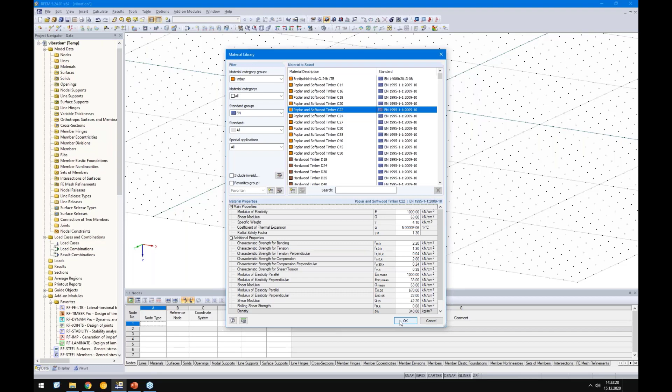So how do we do this? Let's go back to RFEM, and let's start with the timber. I will create a new material. Watch out, they have used 10,000 Newton per square millimeter, not 11,000 as C24, but in this case we can simply use a C22, which should have 10,000 Newton per square millimeter. Then I click OK, and the height of the timber is 200 millimeter and the concrete is 100 millimeter.

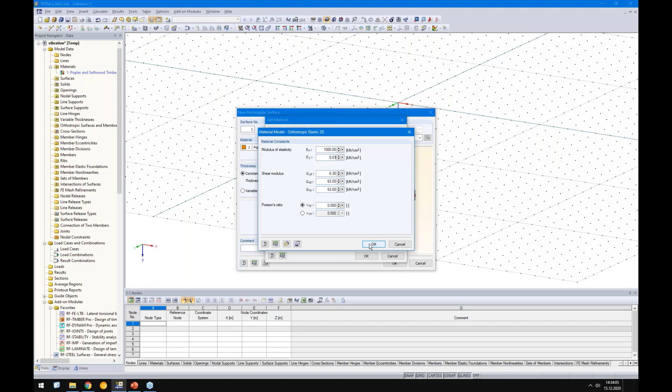So I will enter 200 millimeter, and of course it's still an orthotropic surface, otherwise I will get an error message during the analysis. You see here we have the X direction with a strong E modulus and the weak one in Y direction. In this example we can directly set it to 0 because in the hand calculation from the source, no stiffness was considered from timber. There's a tiny stiffness, but not much. So it's an orthotropic surface with 200 millimeter.

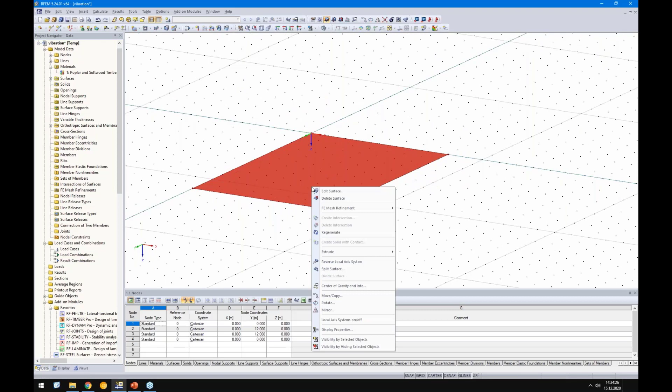So it has 8 by 12 meters. Let's double check, 12 meters and 8 meters. Then I will copy this surface and create a concrete. The thickness was 20 centimeters and 10 centimeters, which means we need to lift up this concrete surface by 0.15 from center to center.

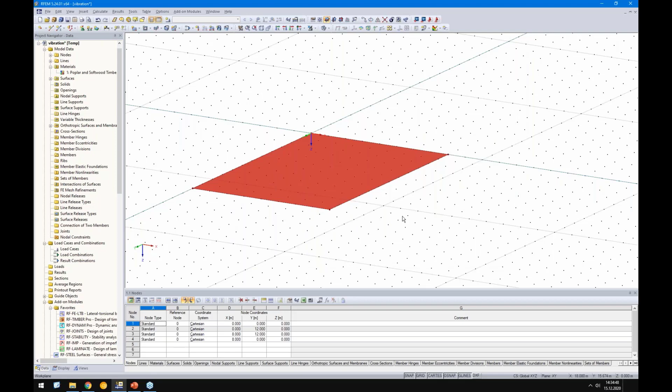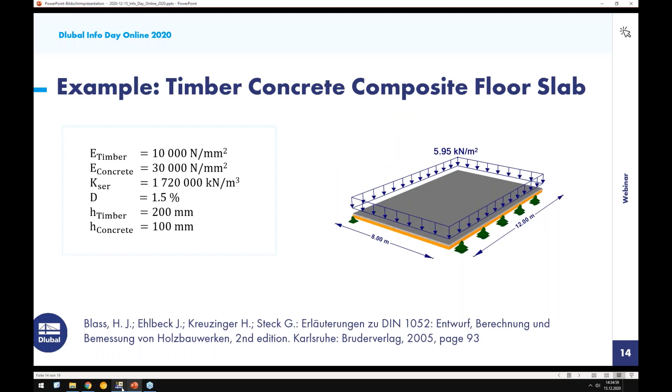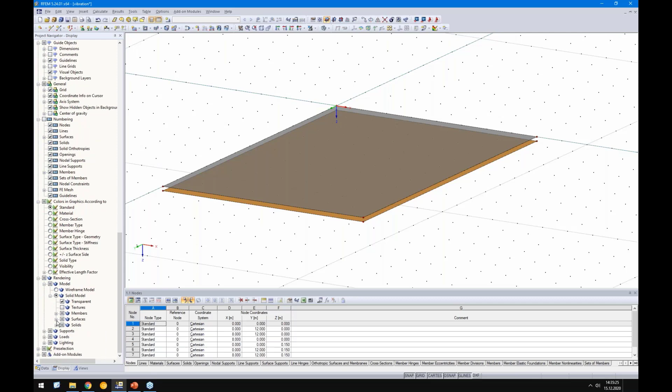So we need a new material here. They have used 30,000 Newton per square millimeter, so we should use a concrete with about 30,000. It's a C20/25. But it has only 100 millimeter, so we will switch this to 100 millimeter. Afterwards, let's check if everything is correct. We activate the thickness for the surfaces, and when we zoom in, we see this is the concrete from here till here, and from here till here the timber, which looks fine.

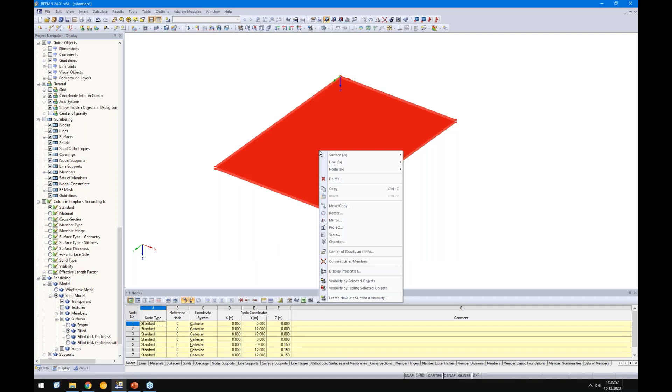What we need to do now is connect the concrete slab with the timber slab. I will show the possibilities on two examples. The first way, I start with a contact solid. I select these two surfaces and say create solid with contact. You see directly we get some boundary surfaces. These boundary surfaces have zero stiffness because they get the stiffness from the contact solid. We will define this contact solid.

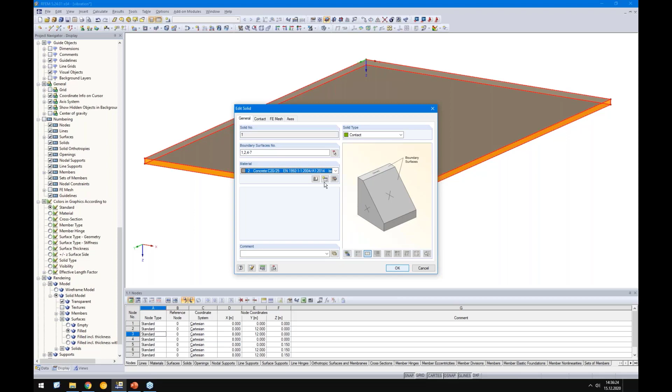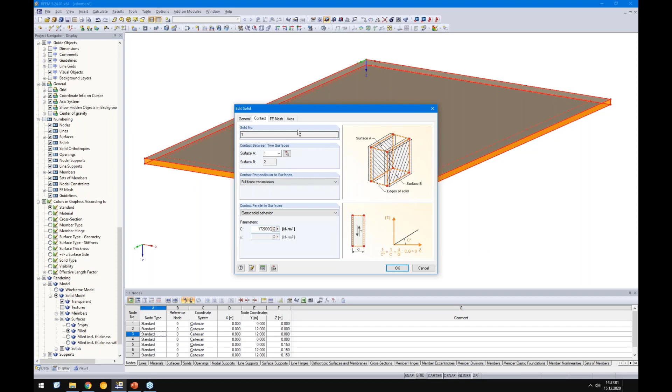And we select the contact surfaces, surface 1 and surface 2. Perpendicular to the surface, we want to consider full force transmission, and parallel to the layers, we want to consider elastic behavior, and the spring was 1720 meganewton per cubic meter, and this value we will enter here. We are in kilonewton, so I will add 3 zeros. Let's double check. On top we have the concrete, maybe better to select standard here, and on the bottom side we should have the timber. Good so far.

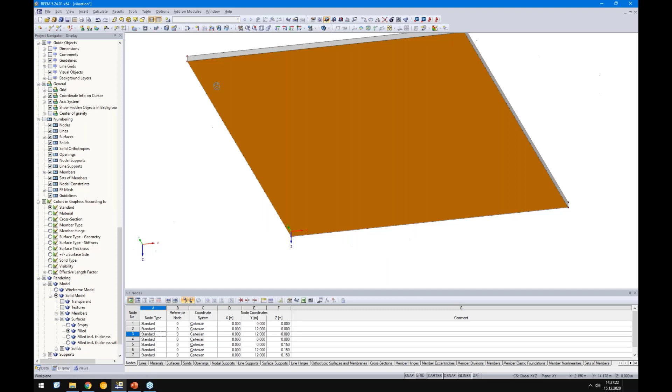Okay, we will support the slab. It's simply supported on this side and on this side. In X direction, I will also consider a tiny spring to keep it stable. Otherwise, there is no support in the XY plane, and with the springs I fix this structure. But since we do not use any load in the XY plane, we use only the mass in Z direction, perpendicular to the surfaces.

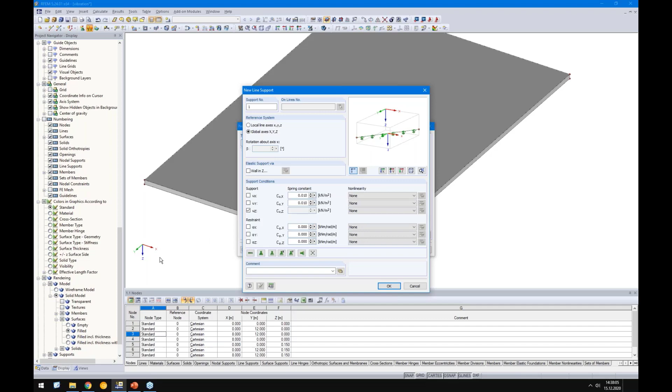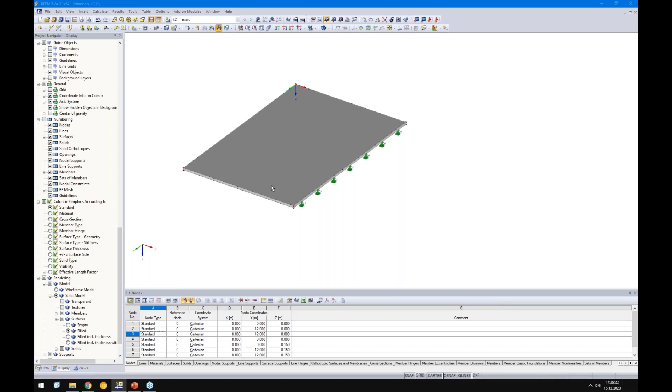Okay. So this line and this line. Okay, I will add a load case. So load case 1, that should be the mass. The self weight is already included in this 595 kilogram per square meter. So I define here directly the force of 5.95 kilonewton per square meter.

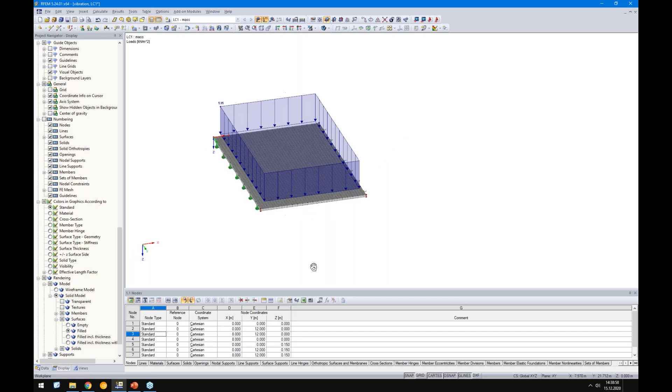And let's take care of the FE mesh size. So maybe we will switch to 0.2 meters, which should be absolutely fine for this example. All right. That's one option. I will show you the second one. For the second one, I will copy the surface via drag and drop. And in this case, I will use the element surface releases.

I will create a new surface release. I want to release another surface. So you see here how it works. We have one solid or surface and another solid or surface, and in between there should be this hinge or release information. So here we have an advantage because we can control both directions independently. With the contact solid, there is only one direction, so X and Y is always the same value. Here we can distinguish, but to compare the results, I will use the same as for the contact solid.

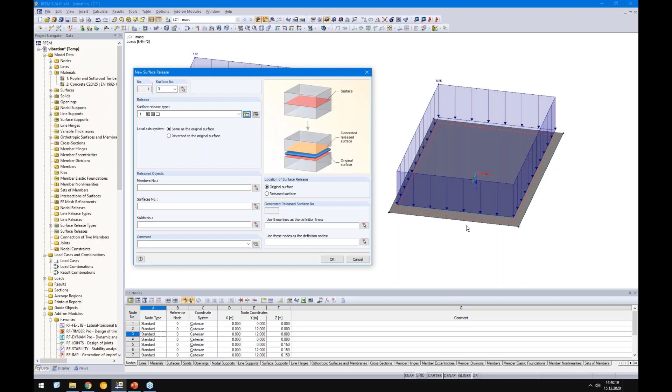Okay, good. And I can release the object here, the same as I did with the line releases, but there is no element yet that I can release, but it doesn't matter. I just click the OK button, and when I click on the surface, you see there is already a surface. And this surface, I will add it. It's a null surface, but no big deal. I will switch over to orthotropic and assign this timber surface. I just need to adjust the thickness of the timber to 200 millimeters. Okay.

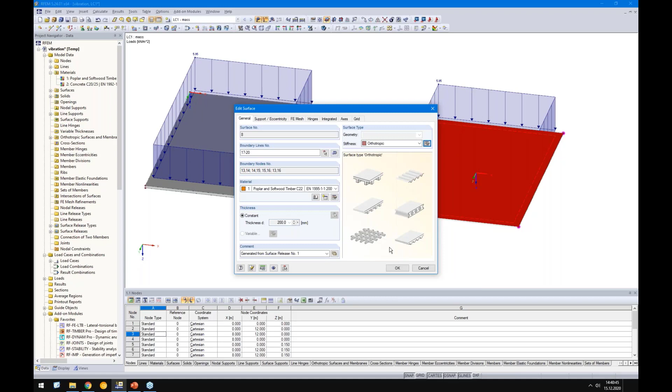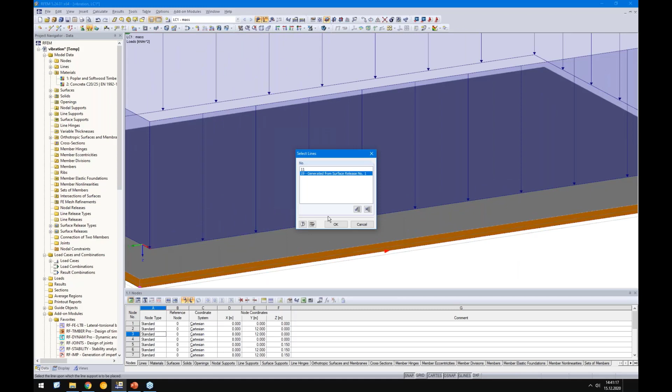And now I need to create an eccentricity for this concrete surface of minus 150 millimeters. And now I have the same model. Oh, not the same, I forgot the supports. So on the left side and also on the right side. Okay, let's run the analysis for load case 1. Meanwhile, we check the solution from the analytical equation. From the example, it is 9.5 millimeters.

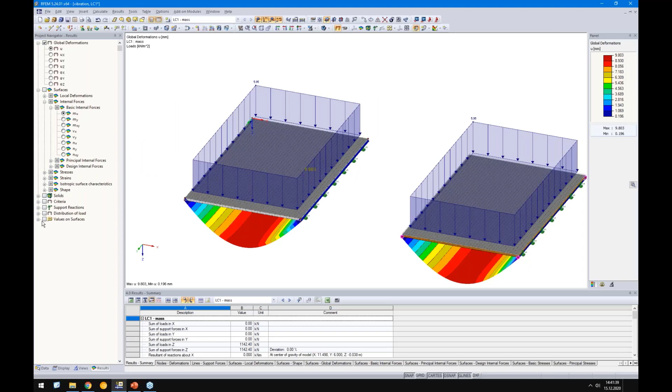Let's go back and see the result. It's good, but it's still a bit away from the 9.5 millimeters. But you can see here in the center we already have the 9.5 millimeters, but not on the outside. That comes from the concrete and the Poisson effect. Of course, in the hand calculation or analytical equations, this Poisson effect is not considered, and therefore I will neglect it here too. I set it to 0.

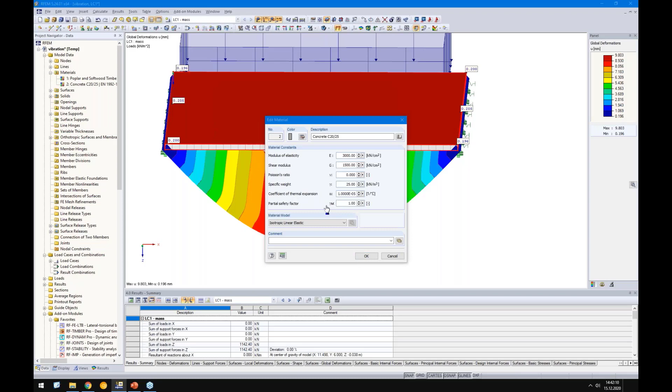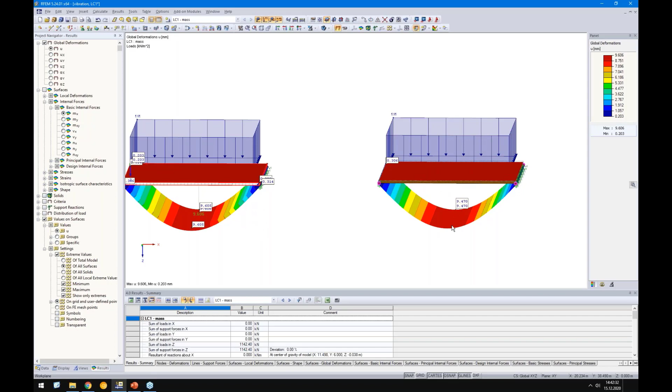Okay, then start again. So we had 9.5 millimeters. We have 9.6 now here, and we have 9.47 on the right side with the surface releases. So it fits perfectly with the result from the analytical equation.

They write here, it's bigger than 6 millimeters, and therefore the eigenfrequency of this structure is lower than 7.2 hertz. This was the limit in the old German timber code, and the new limit in the Eurocode is 8 hertz. But there is always a relation between the deformation and the eigenfrequency. So I did a small article about this issue.

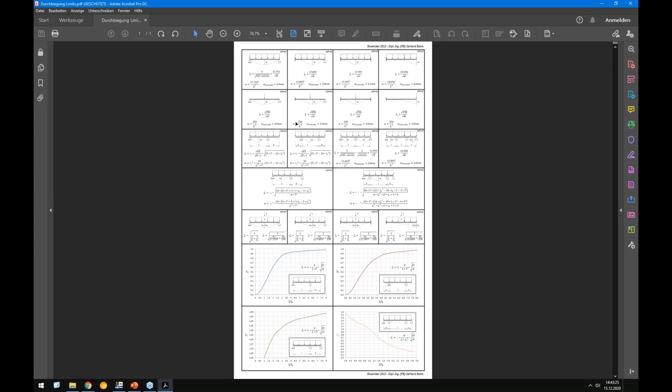It's explained here. When you go to the knowledge base on our website, you will find this information, and inside there is a PDF file I created a few years ago, 2013 already. And here you can see the relation for a simple one-span beam. The relation is this equation, maybe well known from literature.

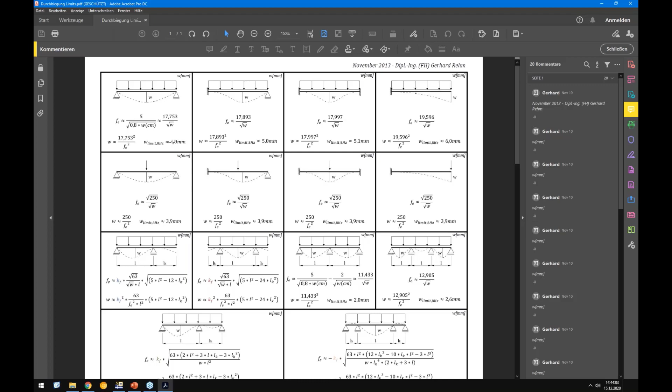So for Eurocode 5 and the limit of 8 hertz, we have around 4.9 millimeters. So if the deformation of this one-span beam is lower than 4.9 millimeters, the eigenfrequency is automatically higher than 8 hertz, or 8 hertz exactly. And in case the deformation is bigger than 4.9 millimeters for a one-span beam, the eigenfrequency is smaller than 8 hertz. That's just a simplified rule.

Okay, good. Then let's go further. They prove the natural frequency. So in this case, it should be 5.87 hertz. Okay, it's really low, and they write here some additional design requirements are necessary, the same as in Eurocode 5, but of course Eurocode 5 does not provide any information when the frequency is lower than 8 hertz. There are some literature and approaches how to deal with it, for example, from this code or from the source I mentioned, or from other literature.

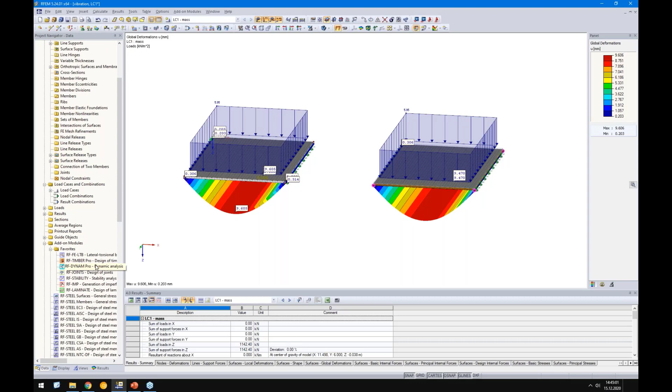Okay, so let's check the eigenfrequency, and we cannot check it directly in RFEM. We need an add-on module called RF-DYNAM Pro. This DYNAM Pro add-on module is for forced vibrations or for equivalent loads, especially for seismic design and so on. In our case, I just want to use this first sub-module. There are 4 sub-modules inside this global DYNAM Pro module. I use this natural vibration module, and I go here.

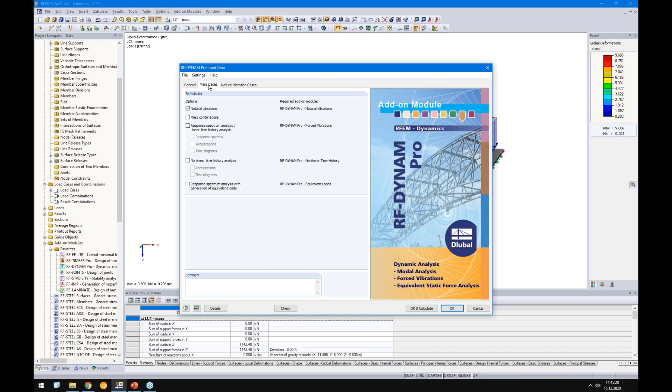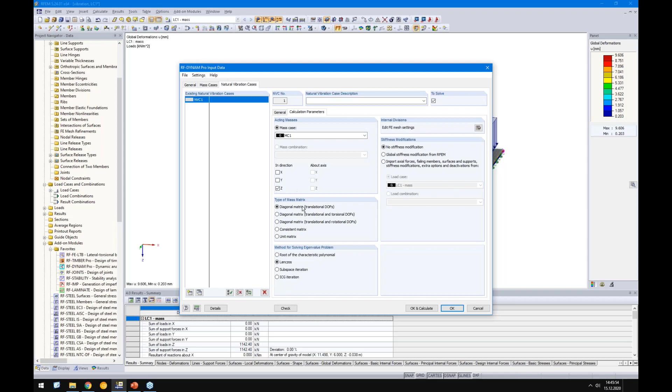I will assign my mass. So in this case, I select: please use the mass from load case 1. In the next tab, I can select how many eigenvalues I want to calculate. Of course, I'm mostly interested in the first one. And here I say, please do not consider the masses in X and Y direction, since I have no support here. I'm only interested in the Z direction. Okay, then let's calculate the frequency.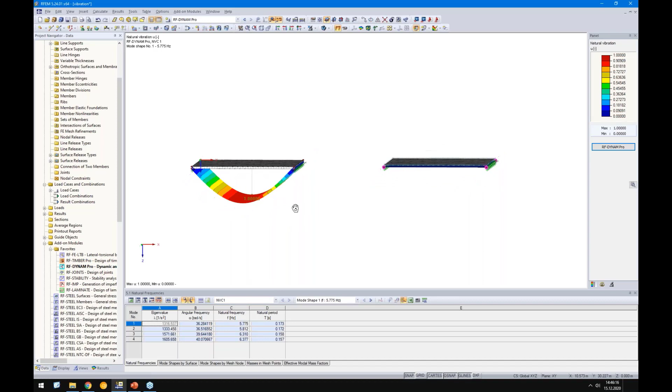Okay, you see the result here on the bottom side, and accordingly the eigenshape. Of course, for a one-span beam, I do not expect anything else. So we can check the second mode, for example, it's on the right side, and you see here the first and second mode. The first mode is on the left side with 5.77 hertz, and on the right side with 5.8 hertz, which is fine, since the approaches of surface releases and contact solids are not exactly the same. Therefore we got different deformations, but they are close enough.

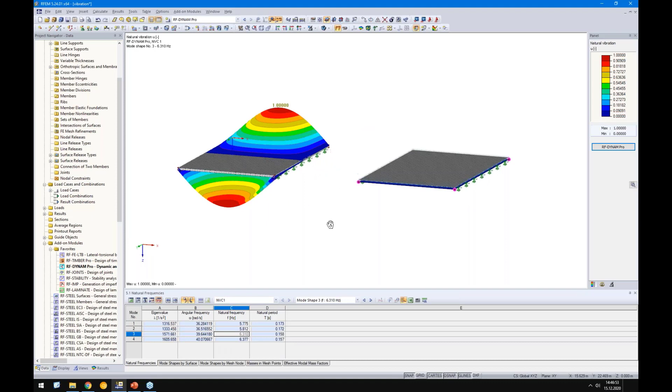For example, the third mode, that's some torsional mode, but I'm not interested in this mode now. I will check this one here. So eigenshape 5.7, let's say 5.8 hertz. And here in this literature, it's 5.87 hertz, which is fine. Then we need to check the stiffness under a man load of 1 kilonewton. It's actually the same as in Eurocode 5.

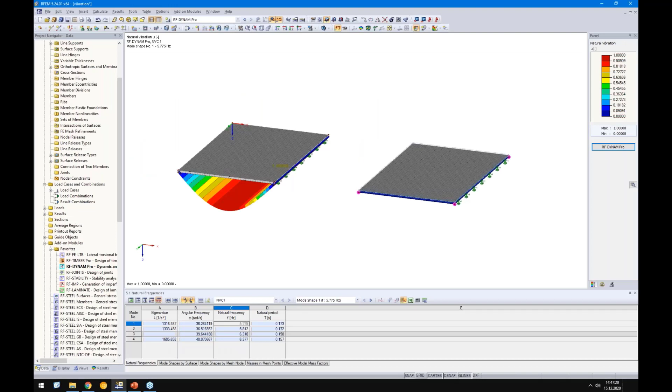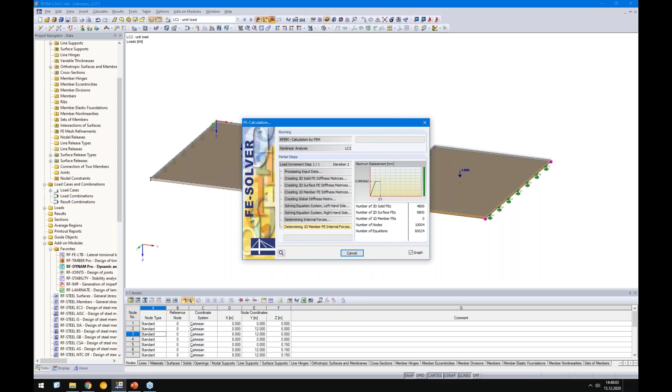We will do this. So I will create a new load case, and I call it unit load. And I will apply this load exactly in the middle. And the same here. And I add this 1 kilonewton on this generated node. All right. So we run the analysis. And we see a deformation of around 0.07 millimeters. Compared to the literature, it's a bit smaller.

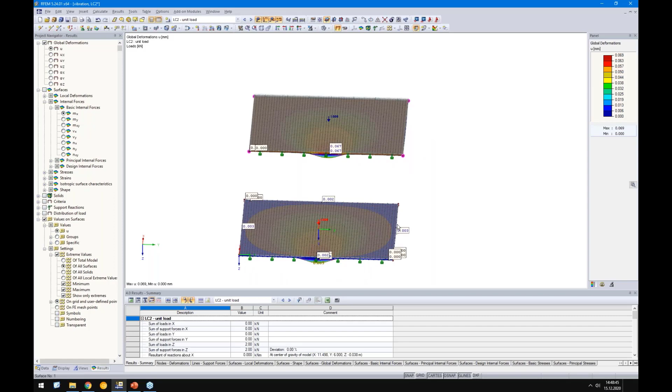The reason is because they calculate the stiffness of this floor with an effective width. They do not consider the whole width of 12 meters. The effective width was, I guess, 3.8 meters in this example. So if you would reduce the width of the floor to 3.8 meters and distribute the node load to a line load, you will get exactly the 0.083 millimeters. So in this case, it is a bit too uneconomic, but it's not far away, so it's okay.

Okay, and the next step was the acceleration design. Because our frequency is smaller than 8 hertz, we need to check the acceleration.

Empirical investigations in the 80s offered the result that vibration with frequency lower than 8 hertz is dependent on the acceleration, and with higher than 8 hertz, it's dependent on the velocity. In this case, we are smaller than 8 hertz, so we will check the acceleration.

There are tests showing that this velocity check, as done in the Eurocode, is actually not really design-giving anymore, because a typical timber floor is, for acoustic reasons, already really heavy. So the velocity check mostly is never controlling and not important. But the acceleration needs to be checked.

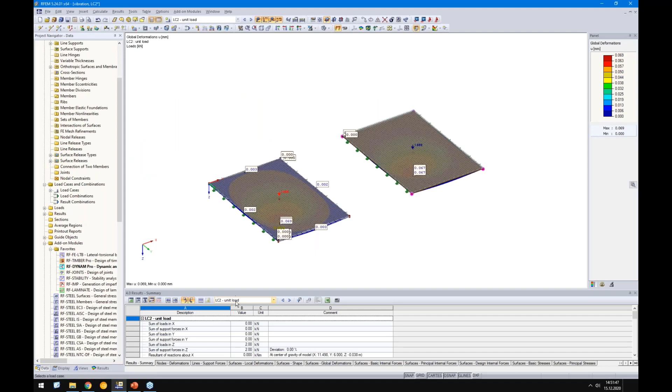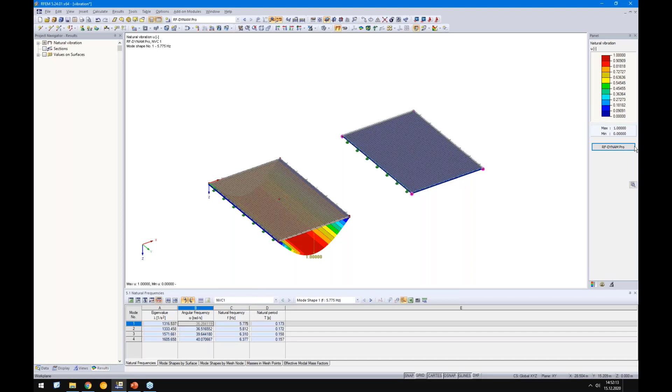All right, let's go back, or before we go back, maybe we can switch to RF-DYNAM Pro. No, we cannot. We need to restart the analysis again because I want to copy already the natural frequency, since I need it in the module. In this case, I need the angular frequency omega, so I copy the first one. And then let's go to RF-DYNAM Pro.

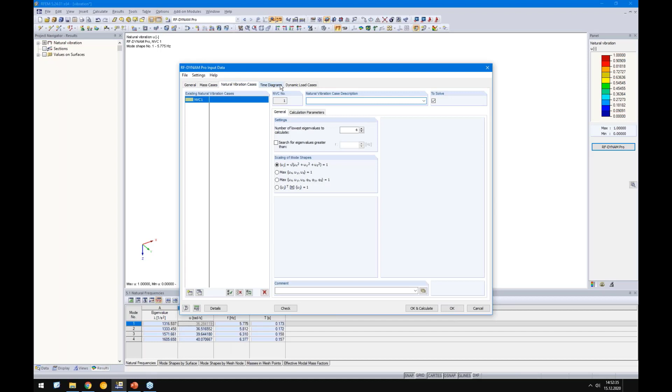In this case, I need to activate this response spectrum analysis option, or in this case it's actually a time history analysis with a time diagram. I can skip the first two tabs because they are not important for it. And here I need to define this function, and I copied already this omega, which I have to enter here. So this is actually a resonance check.

So do not enter the angular frequency of a person. When you walk around, you walk with around 2 to 2.45 hertz, and 2 times pi times the frequency is the angular frequency, but do not use the angular frequency from the person. What you need to do, since it's called resonance check, is enter exactly the angular frequency from the first eigenshape to get the resonance.

The shift should be 0, and multiplier I write down just a 1 for now, and you see this periodic function, which is fine.

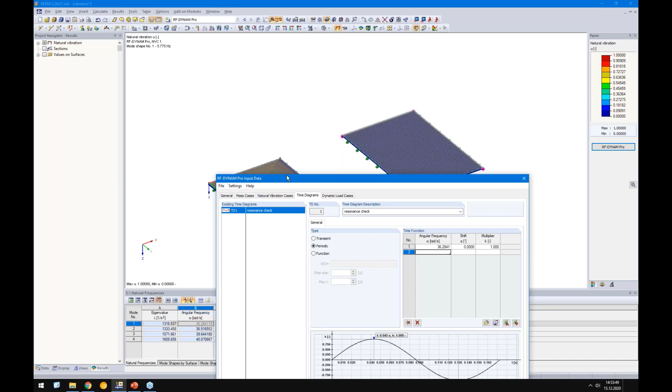But we need to consider the correct force. We remember in load case 2, I have defined this unit load of 1 kilonewton. So when we check the force here, which is on the upper side, we have 0.1 times 700, multiplied by 0.4, equals a factor of 0.028. Let me double check this in my notes.

Yes, it's correct. So when we multiply this factor by this 1 kilonewton, we get exactly the same force as it's written here. That's actually all for this tab.

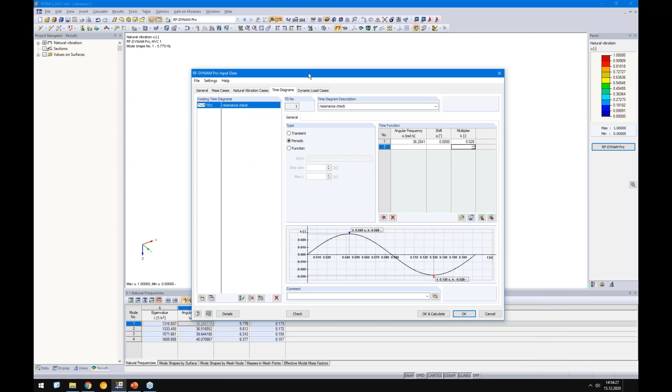Then we switch over to the dynamic load case. We will do a linear modal analysis, and here I can connect this unit load, this 1 kilonewton, with this time diagram. I can use this factor here too and use a factor of 1 here. That's also possible, but it's okay now.

Very important are the time steps. They should be small enough to cover all important load steps or time steps, and long enough to cover the resonance. So you need to play a bit around with it. Start with one value and then see in the results if resonance occurs already or not.

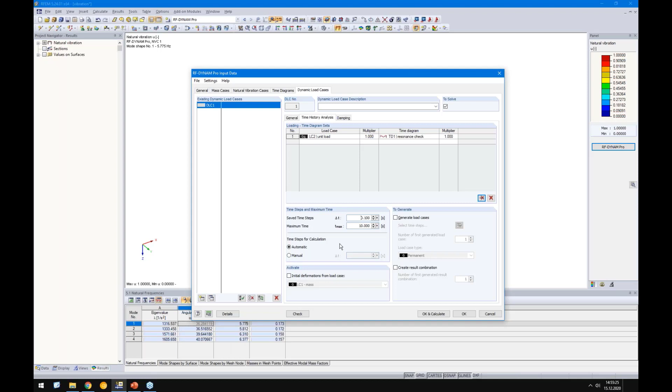And at least we need to define the damping, and it was given by 0.0155. I guess that's all.

Okay, I need the calculate button, let's check what result we get. We get 0.064 meters per square second. So 64.

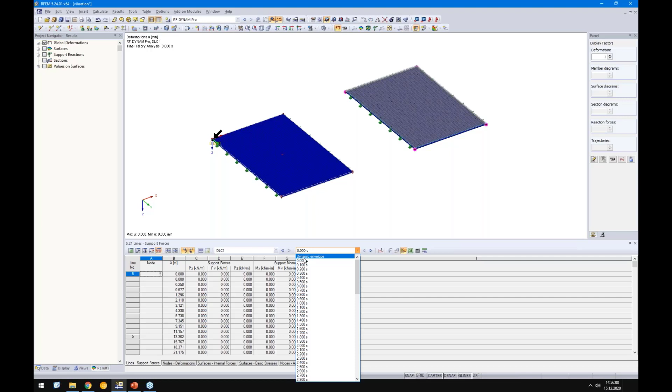Now we get the result from the dynamic load case, and here we get the result from each time step till 10 seconds. But I'm interested in this dynamic envelope, which considers all of these time steps. Okay, here I will switch to node accelerations. So we know this node is number 17 and this node is number 18.

All right, so in this example we get... it's not exactly the same, but it is okay. We get 0.032 when we compare it with the result from the analytical equation. We get only 50% of it, exactly 50%.

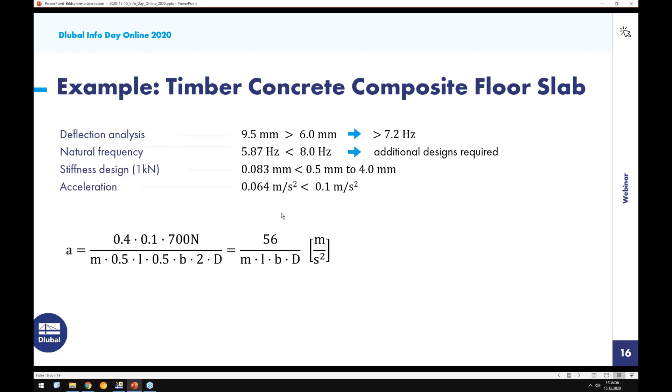When we think about this equation here on the bottom, what they have used in this example, they think about a 4-sided supported slab. As you see, they estimate only half of it goes into this support and half into this support. So what we actually need for our example is this one, because we use it as a one-span beam. So they have mixed it in this literature a bit. It was a bit confusing at first, but I figured this out at the end.

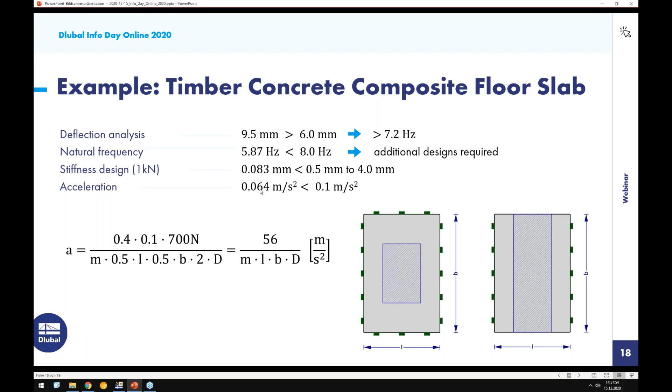If you reduce this 0.5 by b, so if you neglect the 0.5 by multiplying the whole equation with 0.5, you multiply also this value with 0.5, you will get exactly 0.032 meters per square second. So this is the way to check it.

And of course you can add the supports here and here, so support it on 4 sides and run the analysis, copy the angular frequency again, insert it in the time diagram, and then you will get exactly this 0.064 meters per square second.

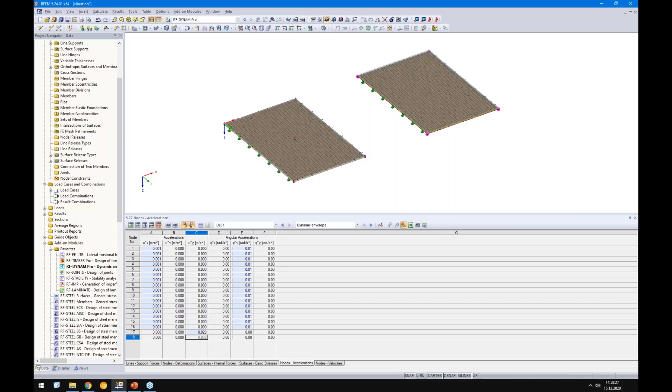But this is your homework. For me that's all from today, and I hope everything was clear with this approach and with the defining of the contact solids and the surface releases. It's a mighty feature. Of course, for this slab, maybe I would not use this Dynam Pro add-on module when there are some easy, simple analytical equations where you are much quicker.

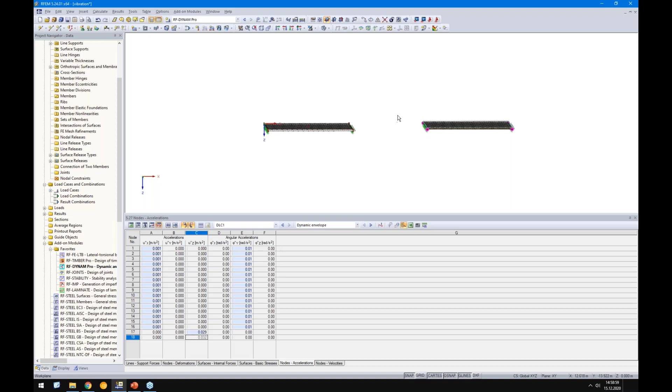But in case of some complicated structure, or please consider you have a downstand beam here, so you have no rigid support, you have a semi-rigid support, then it's getting really complicated to get these accelerations with analytical equations. Maybe one thing I want to show you is here, this time course monitor.

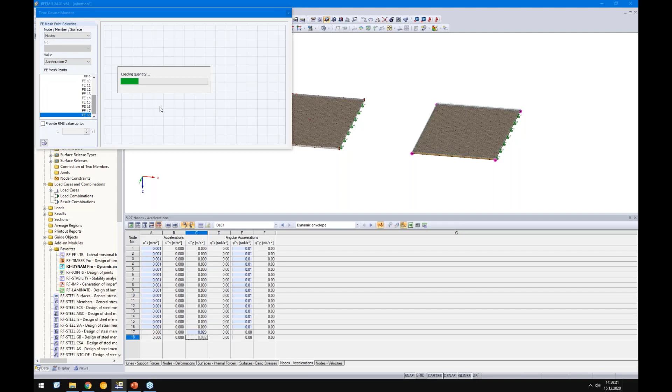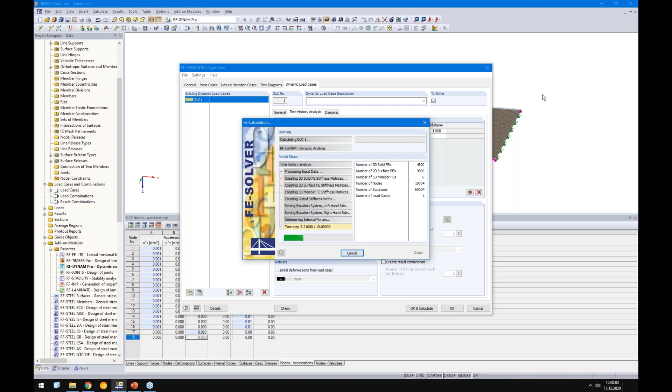I want to check the acceleration in Z direction for node number 18. Okay, maybe you see here, maybe the time step was not small enough. Maybe we should add here another 0. I will do this quickly to get a proper result. We saw that the function was not really homogeneous, there were a lot of peaks and so on.

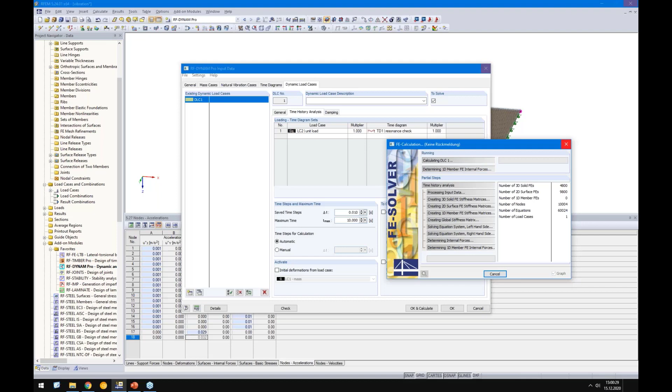I increase the increments here, and then let's check. Of course, the more time steps you use, the longer the analysis takes, but we'll see the result. Still loading.

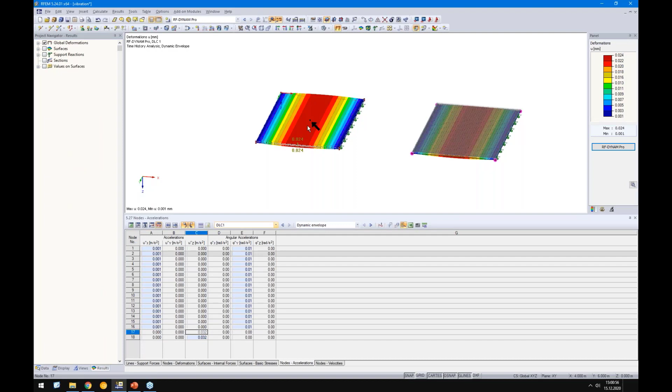Okay, so you see it was the same result. It does not change, only for the contact solid. Now we get the same results for both because of smaller time steps. And when we check this time course monitor, hopefully we get a better curve.

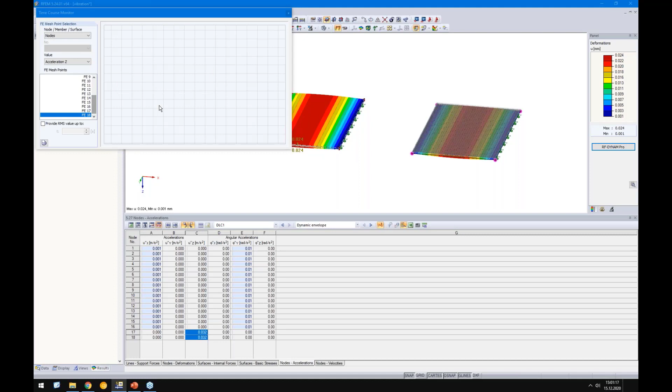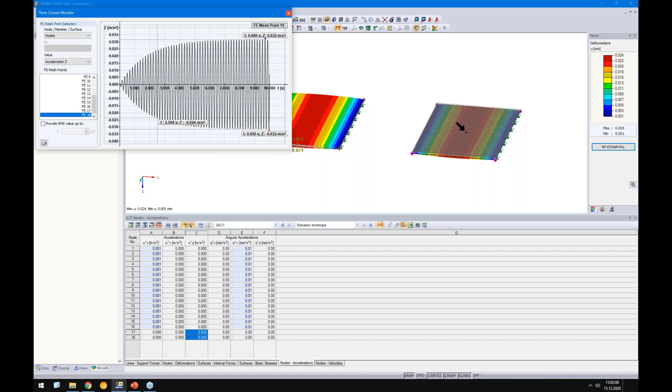Okay, so you can evaluate all the results, from velocity, from acceleration, inside here, this time course monitor. Okay, good, so that was it from my side. And I will give back to Andreas, thank you very much.